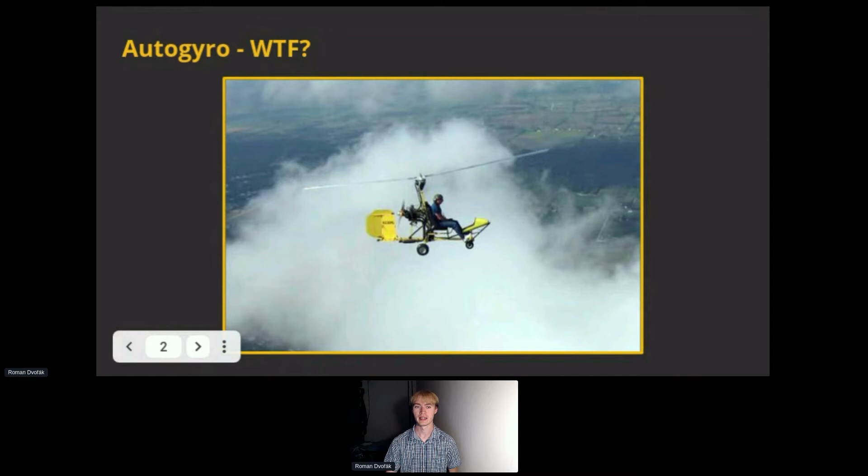Autogyro is not a well-known thing. It's a type of aircraft that is heavier than air, and it's flying by a free spinning rotor that produces lift. Autogyro was nicely illustrated in XKCD comics, so we can read it together. Autogyro looks like a helicopter, but it's nothing like a helicopter because it has a rotor on top, but this rotor is not powered and is free rotating.

Control of autogyro is much easier because it's controlled by moving, tilting the entire rotor plane, and the setting of rotor blades is fixed. The big blade on top is not powered and spins freely, it's clear.

Flies like a plane, but is nothing like a plane. Yes, it has a propeller and some engine that pulls or pushes the autogyro forward. This forward movement rotates the rotor. Autogyro is sort of like a powered parachute. Autogyro is capable of unpowered autorotation, which is good in some case of failure of avionics or of some actuators. It needs a runway to take off, but not a long one.

Autogyro is safe unless you do one thing instinctively do to escape stall in a normal airplane, in which case it will crash immediately. It's a problem for manned autogyros with pilot on board. Autogyros with autopilot can be programmed and they avoid it, until autopilots will not be based on artificial intelligence. Fortunately, this is not the case of PX4 autopilot. It can land vertically, it cannot hover, and never stalls.

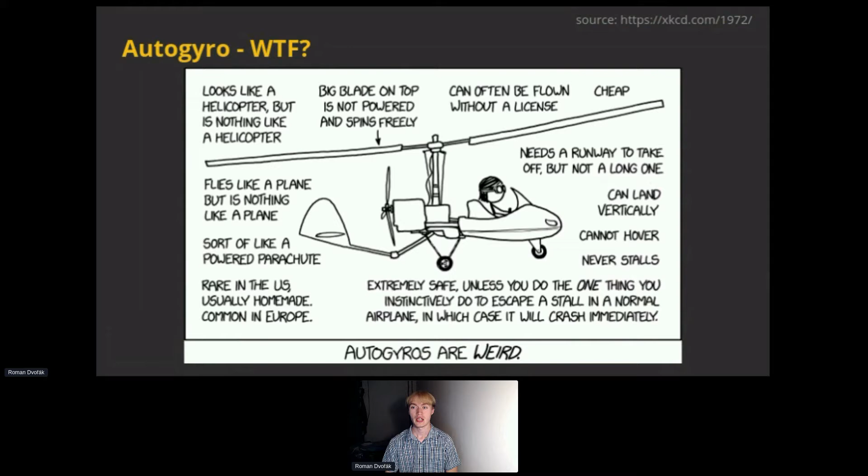Autogyro was invented by a Spanish civil engineer, Juan de la Cierva. Juan de la Cierva was interested in airplanes, and he assembled several aircraft himself. After some crash of his airplane due to stall, he decided to invent something that is safer than a standard plane. He wanted to build a safer airplane. His demands were: able to fly at low speed, able to fly safely at low altitude, good controllability regardless of speed, and independent of power unit.

His first flying autogyro was built in 1923. It was Autogyro C4, and the first circular flight was 4 kilometers long, and it took 3.5 minutes. And how does autogyro work?

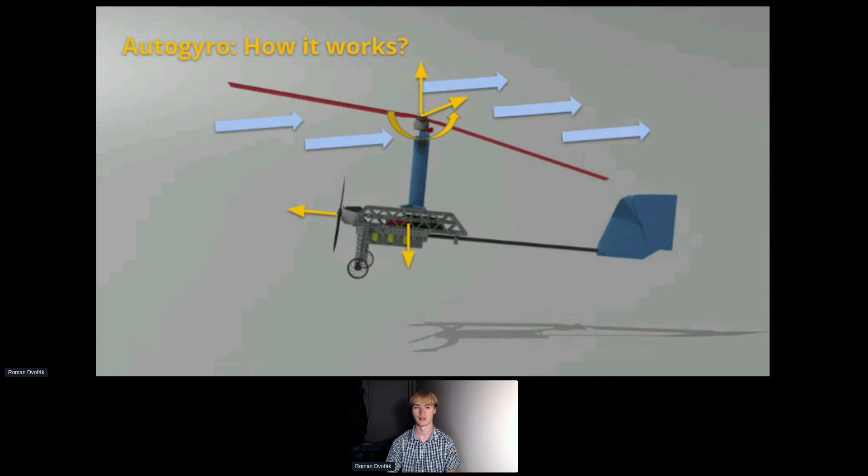The principle of an autogyro is quite simple. In general, forward speed is obtained from a motor with propeller. This power unit can be in drag or in push configuration. The rotation of the rotor creates lift and drag that carries the mass of the autogyro. Surrounding airflow from forward movement ensures that the rotor is spinning at sufficient speed.

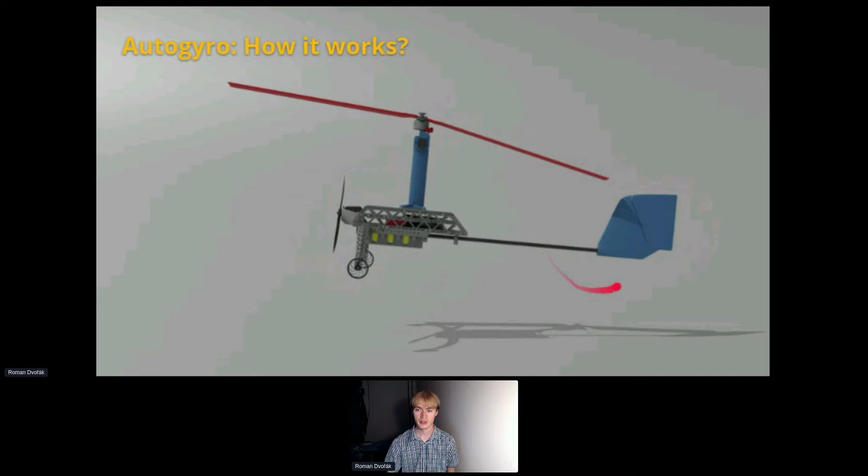And how is autogyro controlled? It's also quite simple. Roll is controlled by tilting the rotor plane to the sides, and pitch is controlled by power unit of motor, and by tilting the rotor forward and backward. Autogyros are usually equipped with a rudder that eliminates torque of the rotor and motor.

Now I would like to compare some key parameters of these platforms, of autogyro and of other common platforms with multicopter, helicopter, and plane. The easiest takeoff has multicopter and helicopter because they can take off from a place, vertical takeoff. Plane and autogyro need some distance to take off.

Some small disadvantage of autogyro is that the rotor must spin before takeoff. Therefore, it's not possible to start by some catapult. Forward movement is used to reach takeoff RPM of rotor.

Safety mode: multicopter have parachute, is only this option. Helicopter and autogyro can do some controlled auto-rotation, but helicopter must enter in this flight mode, and I don't know an autopilot that can do it or knows how to enter this auto-rotation.

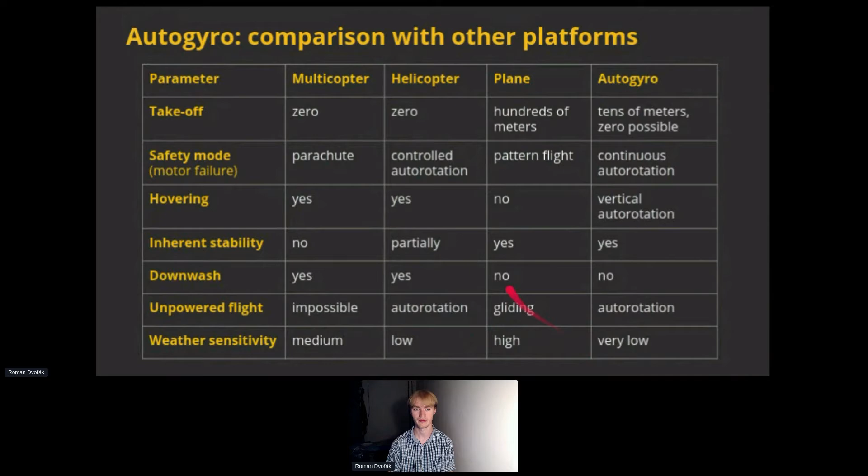Autogyro is the least sensitive of all these platforms to weather, such as wind gusts, and the plane is the most sensitive. Here is a comparison of some performance in real weather conditions and cost of the platform, cost or complexity, mechanical complexity. Autogyro is in the middle. Helicopter has better performance, but it's a more complex and difficult device.

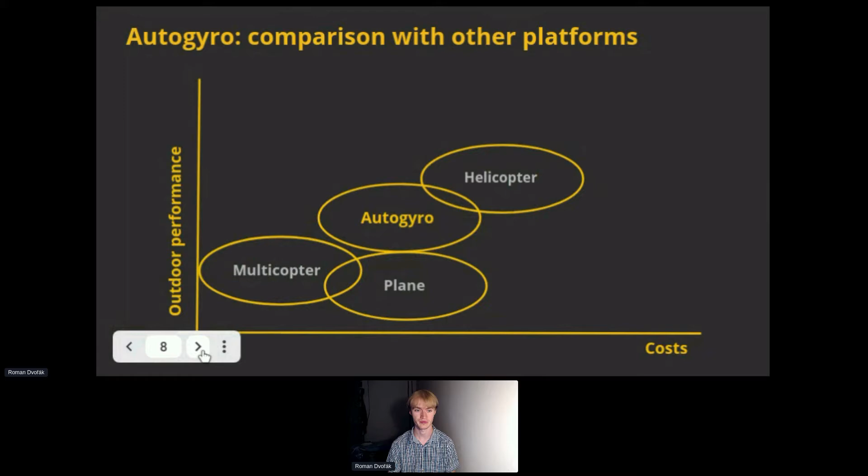Autogyros have much better performance in bad weather conditions. Why did we start with development of an autogyro? We needed a platform that would be able to fly in bad weather conditions and which would be able to do some aerial work, for example, measurement of some parameters of the atmosphere.

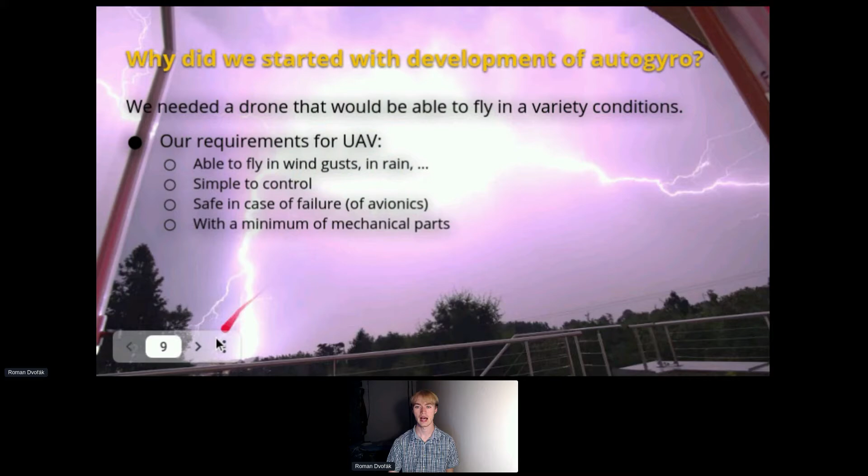Our requirements for that UAV were: able to fly in wind gusts or in some rain, simple to control, simple to pilot, safe in case of some failure of avionics or failure of some mechanical parts, and with a minimum of mechanical parts. After exploring all options and available platforms, the autogyro was selected as a good compromise.

The autogyro is good because it is resistant to hard weather conditions, wind gusts or bad weather, high precipitation, snowing, raining, and so on. The autogyro is able to take off on a short runway, which is good if we want to take off in a place with bad terrain on the ground. TF-G2 can be started by throwing from the hand or from some moving platform, for example, from a moving car. We also tested the start on a rope, as from a winch.

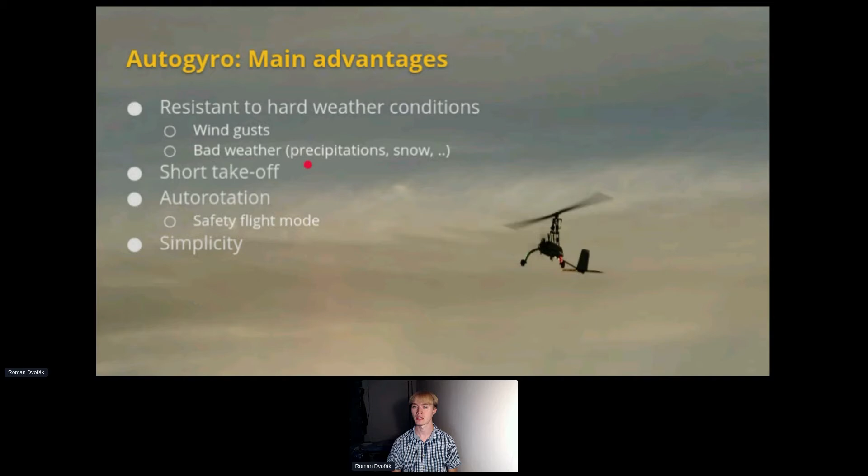The autogyro is always in autorotation mode, and it is also a safety mode. So the change between normal flight and this safety mode is very simple and quick. The autogyro is also very simple. It contains only a few mechanical parts. We definitely needed it to be unmanned and to be able to fly automatically. When we started, we didn't know any other autonomous autogyro project; especially, there is minimal information about autogyro controllers and their implementation.

The next step was that we needed to select some autopilot. There are several ways to choose. Developing our own controller is not a good way because it's not sustainable for the future and for long-term development. A proprietary autopilot is also an option, but in any issue with incompatibility of the platform and that autopilot, it's very difficult to solve it. It's not suitable for development of a new platform on a proprietary autopilot.

An open source autopilot was the optimal way for us. There are several open source autopilots, and after reviewing the possibilities, we decided on the PX4 autopilot. The PX4 team looks very helpful to improve and give support for developers, and the structure of PX4 code is nice because developers keep it in a flat, maintained development tree, and all features are in one branch.

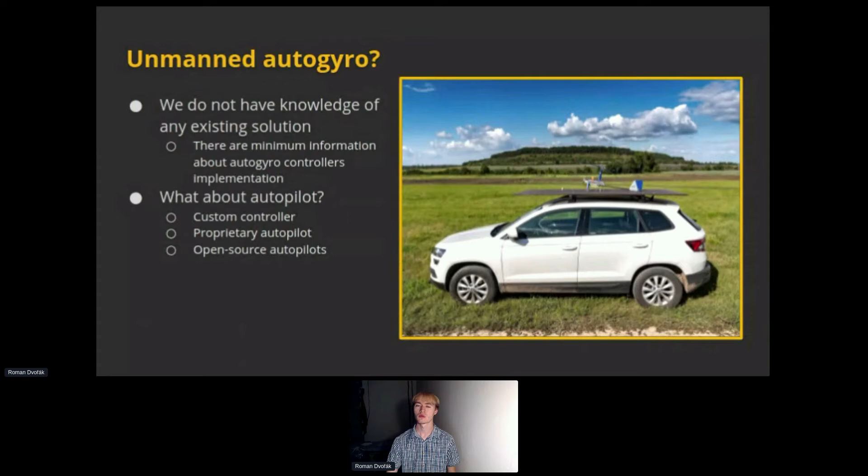Then we started to figure out how to get started. We had no experience with autopilots, with PX4, or with autogyros at the beginning. We started by following the documentation of PX4, and we created the first airframe for the RC model Auto-G2. It was our first flying autogyro at all. Auto-G2 is a commercial, very light RC model which needs some modification. We mounted the autopilot into it, and we made some improvements of existing parts using 3D printing. But very quickly it wasn't enough for us.

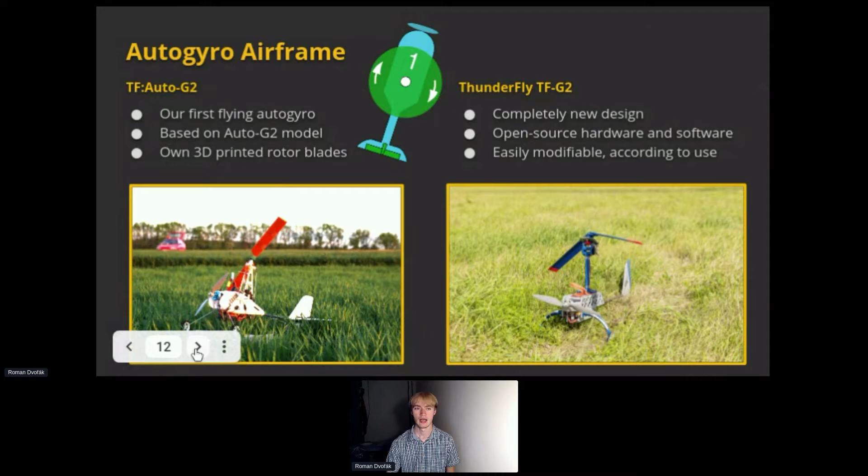During the lockdown in the Czech Republic, we continued with development, and we designed a new autogyro from scratch, the unmanned autogyro ThunderFly TF-G2. Autogyro TF-G2 was designed as an open source project. All construction parts are drawn in the open source 3D CAD software OpenSCAD and are available on GitHub. Except for common mechanical parts such as bearings and screws, and some avionics and electronics, autopilots, motors, sensors, servos, it's almost completely 3D printable.

It's controlled by a PX4 autopilot, and 3D printing provides us a way to very fast development, and it's very easily modifiable. The original intention was to create an autogyro for training pilots of bigger unmanned autogyros: learn how to operate RC, how to command the autopilot, how to control the ground control station. Due to its smart and highly parametric design, it is able to do some aerial work and carry a micro payload. It is able to carry up to 100 grams. It is enough for some sensors or some payload.

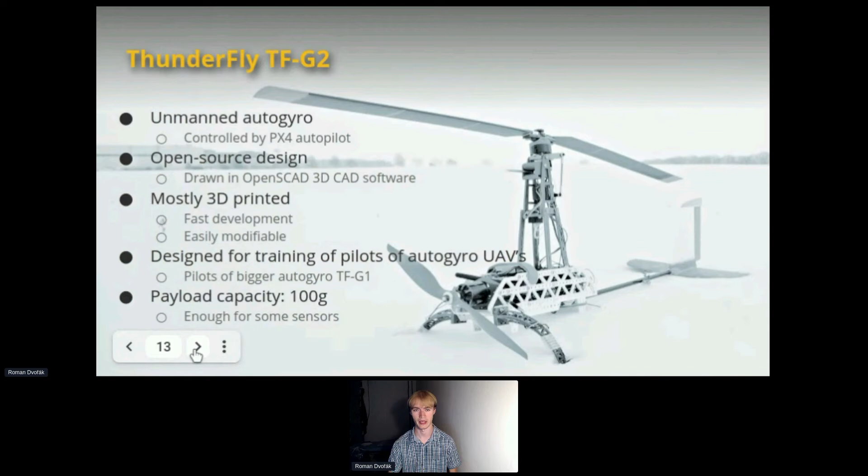On this slide, you can see some highlighted parameters of our autogyro. Weight is up to 1.5 kilograms. In the air, it can fly up to half an hour, and trajectory distance can be up to 25 kilometers. It is very easily repairable due to 3D printing and open source, and the construction is designed under an open source license. It supports automatic flight provided by the PX4 autopilot. It's possible to launch from hand or from a car roof.

Rotor diameter is from 80 centimeters to 1 meter 5 centimeters. Takeoff and landing is possible in crosswind up to 15 meters per second, and it's resistant to wind gusts up to 10 meters per second. Airspeed flight range is between 7 and 25 meters per second.

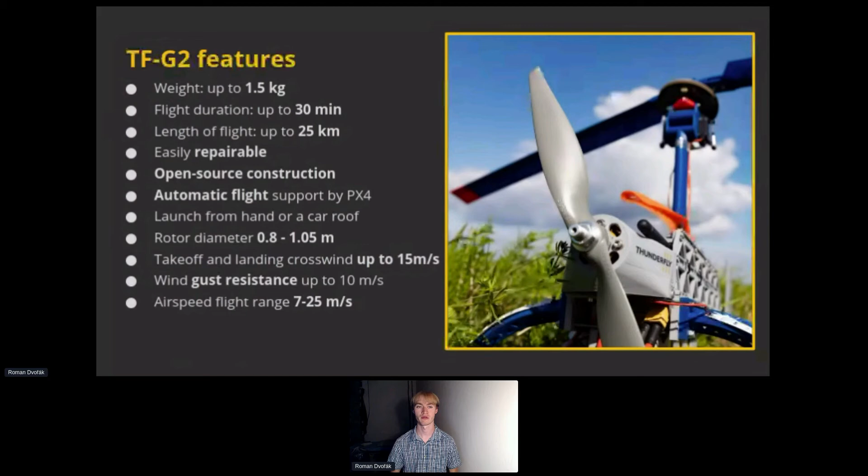During the development, we faced the need to modify certain parts of software and hardware, or develop new electronic sensors. It began with the need to know the revolutions of the rotor. Therefore, we developed our own I2C RPM counter with a probe that can be mounted into the autogyro or any drone.

This RPM sensor, TF-RPM, is in PX4 firmware. Drones usually use a pitot tube for measuring airspeed, but the pitot tube is not sensitive at low speed, below 10 meters per second. And it's very easily clogged by dirt, for example, after an unsuccessful landing.

Therefore, we designed an airspeed sensor that is based on the Venturi effect, a Venturi tube. We call it TFSLOT. It's possible to see here. It is the standalone version, and here it is mounted in our TF-G2 pylon. Here it is rotor mounted.

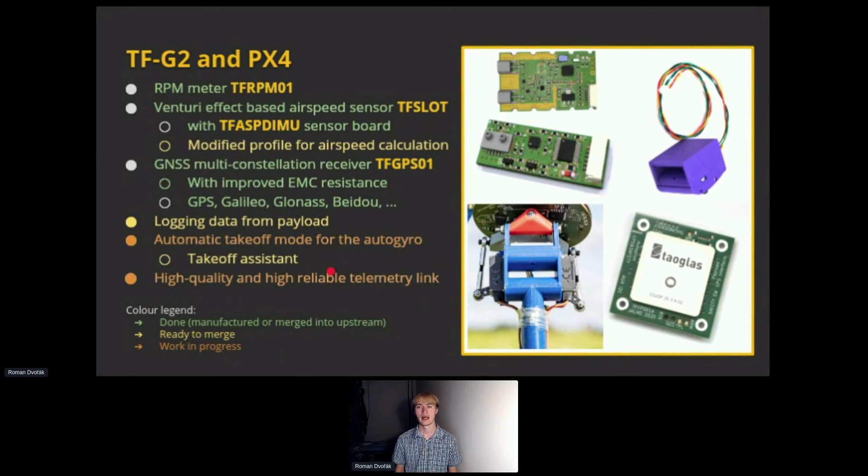The next challenge was to obtain a high-quality and highly reliable telemetry link. Now I would like to show you a short video that shows our work, our autogyro, how it is possible to start, and how it is flying.

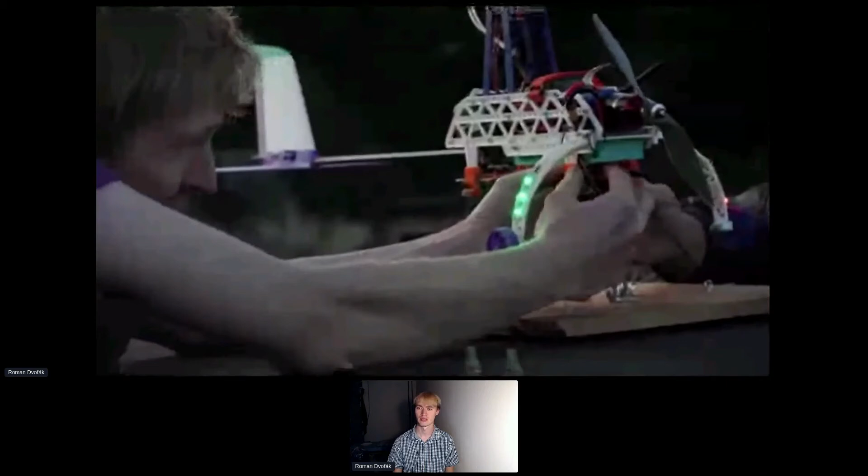Here you can see a start from the hand by throwing it. The man can recognize that the RPM of the rotor is sufficient for safe takeoff. Now TF-G2 is mounted on a platform for takeoff from the roof of a moving car. Before takeoff, the rotor must be rotated, and here is the launch from the roof of the car itself.

Okay, so as I said earlier, the design of the autogyro is completely open source and available on GitHub. During development, we found that it is very difficult to have quality and repeatable quality of 3D printed models by slicing them in the graphical user interface of slicers. And the quality of the printed part very much depends on the settings of the slicer, and it also varies between versions of slicers.

Here's one question. How does vertical autorotation look? Vertical autorotation is a slow decrease of altitude, because the air is coming through the rotor plane, and it speeds up rotor RPM, and it provides us sufficient lift, and it carries the mass of the body of the autogyro. The speed of vertical autorotation is about 3 meters per second. So it's quite a good value for a safety mode.

Yes, Matthew asked for descent rates in fail-safe mode. It's about 3 meters per second.

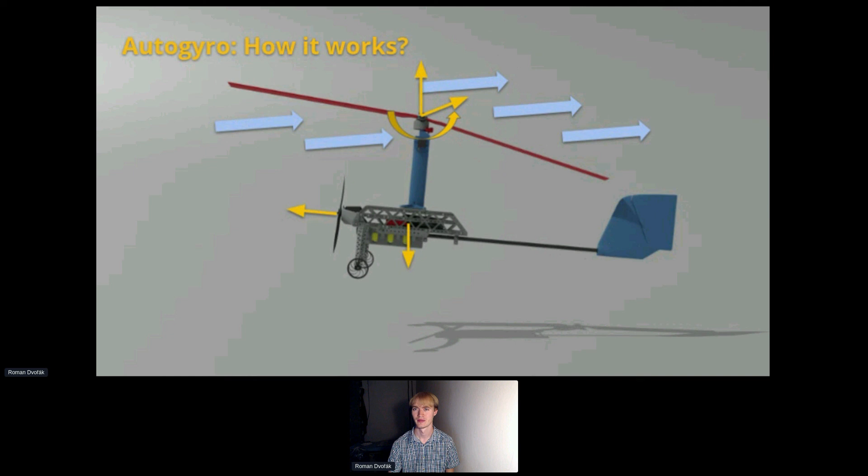Any other question or interest? You can write us a message if you want. So it looks like it's all. No. What is PTHE owner required to flight? I don't know what PTHE is.

What is the power required to fly? For autogyro TF-G2, it's around 300 to 400 watts for straight flight. TF-G2 is usually powered by 5,000 mAh batteries, and it's for 4-cell batteries.